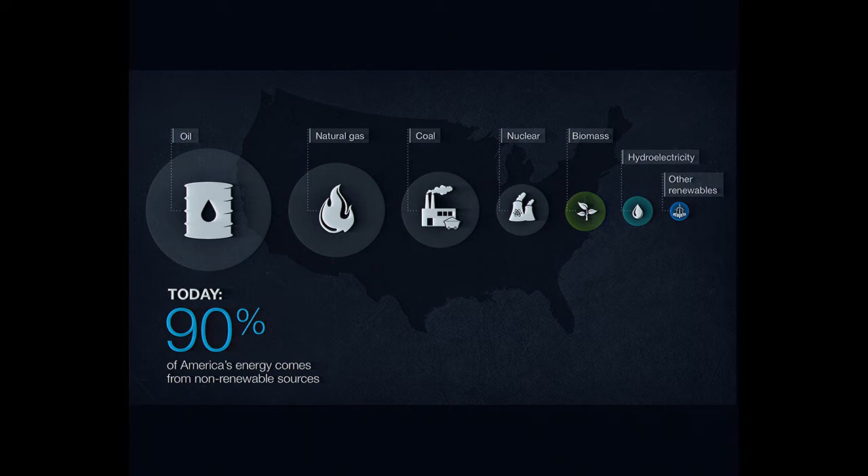And that's why we need a new fire. Switching from the old fire to the new fire changes two big stories, oil and electricity. And they have almost nothing to do with each other. They're less than 1% connected in North America, less than 5% in the world.

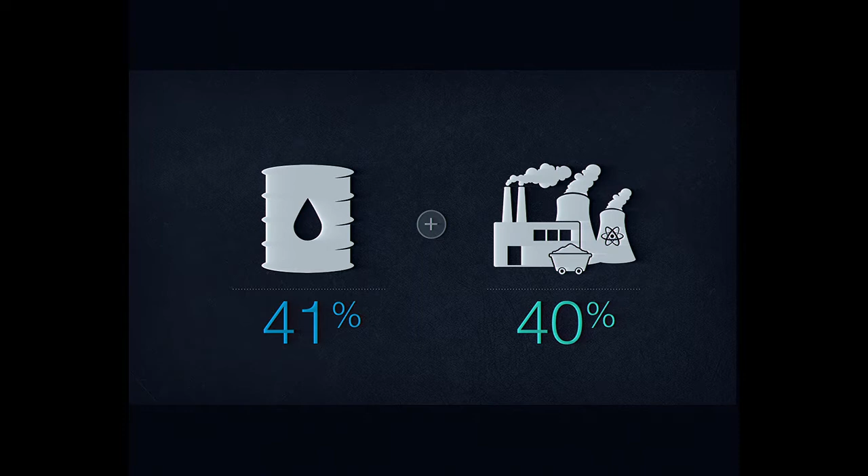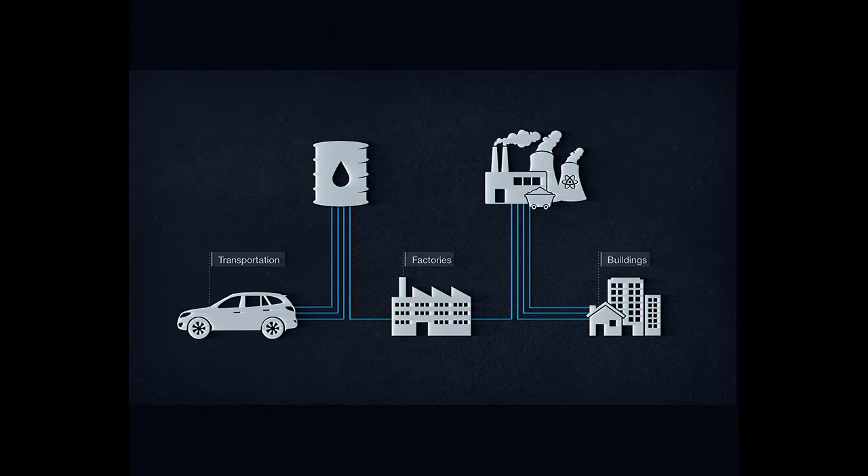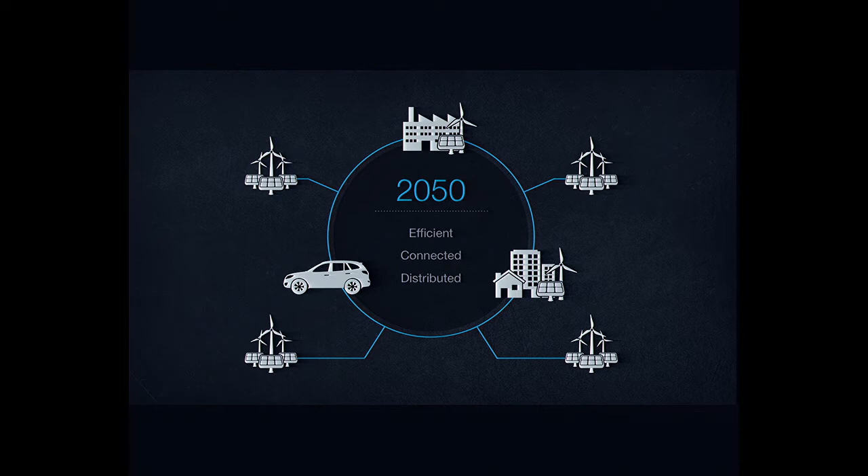But the uses of these two forms of energy are similarly concentrated. Three-quarters of U.S. oil fuels transport, three-quarters of electricity powers buildings, the rest of both runs industry. So very efficient transport, land use, buildings and factories can save oil, coal and natural gas that can displace both of them. But today's energy system isn't just inefficient, it's also disconnected, aging, dirty and insecure, so it needs refurbishment. By 2050, we found it could become efficient, connected and distributed with elegantly frugal vehicles, buildings and factories, all relying on a secure, modern and resilient electricity system. So in the United States, for example, we can eliminate our addiction to oil and coal by 2050 and use a third less natural gas while switching to threefold more efficient use and three-quarters renewable supplies.

That's the transition I'll describe for you. And we found that by 2050, this could cost the United States $5 trillion less in net present value than business as usual, counting all hidden or external costs like carbon emissions at zero, a conservatively low estimate, and lower than the price you have put on it in British Columbia.

Thank you very much for that.

And yet we found that this cheaper energy system could support a 158% bigger U.S. economy, all without needing oil, coal, or nuclear energy. And this transition would need no new inventions and no new national taxes, subsidies, mandates, or laws, thus end-running Washington gridlock.

Let me say that again. I'm going to tell you how the United States, for example, could get completely off oil and coal, $5 trillion cheaper, with no act of Congress, led by business for profit.

There are some policy changes required to enable and speed this change, but it turns out they can all be done administratively or at a state level, because our states, like your provinces, are where, in fact, most of our energy policy gets made and has been for a long time. So the idea here is to use our most effective institutions, private enterprise co-evolving with civil society, and in the U.S. case sped by military innovation, to go around our least effective institutions. And whether you care most about profits and jobs and competitive advantage, or about national security, or about environmental stewardship, creation care, climate, and public health, Reinventing Fire makes sense and it makes money.

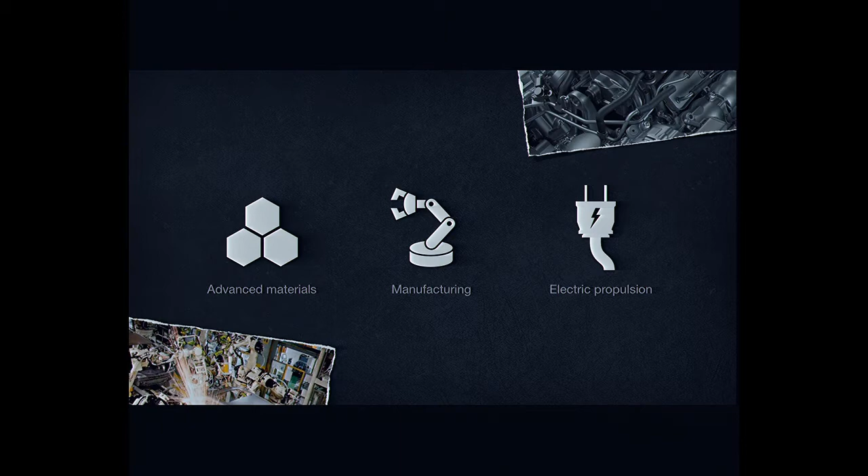The sales of such vehicles can grow and their prices can drop even faster with a temporary fee-bate—fees charged on inefficient new autos paying for rebates on efficient ones. You can make it revenue and size neutral. There are at least 6 such systems operating in the world, 5 in Europe, 1 in Singapore.

The biggest one, in France, in its first 2 years tripled the speed of improving auto efficiency. The resulting shift to electric autos is going to be as game-changing as shifting from small incremental improvements in typewriters to the dramatic Moore's Law-driven gains in computers. And of course, computers and electronics are now North America's biggest industry, while typewriter makers have vanished.

So vehicle fitness, taking the obesity out of the car, opens a powerful new automotive competitive strategy that doubles the oil savings in 40 years, but also makes affordable the electrification that can save the rest of the oil.

Now, North America or Japan or China could lead this next automotive revolution. The formidable barriers are much more cultural than they are technical or economic, and we're helping the new leaders of the auto industry on several continents to tackle them. But the current leader is Germany.

Last year, Volkswagen started making this 0.9 diesel liter per 100 kilometer, 2-seat, carbon fiber plug-in hybrid car. They're in low volume initial production. And BMW also started ramping up mid-volume production of this carbon fiber battery electric car. They've confirmed that its carbon fiber is paid for by needing fewer batteries.

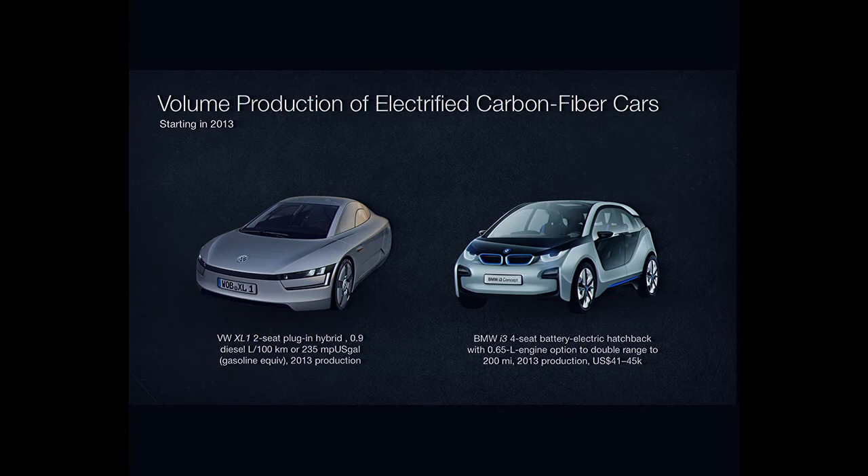Their CEO says, 'We do not intend to be a typewriter maker,' because he can look across München to where Olympia used to make excellent typewriters. Audi has also shown a less than 0.9 liter per 100 kilometer carbon fiber plug-in hybrid concept SUV.

Now, there are some interesting things that North American firms can bring to this party. 7 or 8 years ago, a process developed by one of our spin-offs, Fiberforge, created a test piece for military helmets that have been shipping for several years.

They made it in 1 minute, and it's a carbon fiber thermoplastic form that you can tell from the sound is extraordinarily stiff and strong. Actually, it's tougher than titanium.

Let's see, I think we can pass it around as long as you're really sure that I'll get it back again. But don't worry about dropping it. Tom Friedman actually whacked it with a sledgehammer as hard as he could and couldn't even scuff it.

Now, the technology, by the way, has been sold to a German Tier 1 whose North American operations are in Ontario. So it's now in the supply chain. And this sort of manufacturing technique, and its 16 competitors, can scale—this one in particular can scale to automotive cost and speed with essentially aerospace performance.

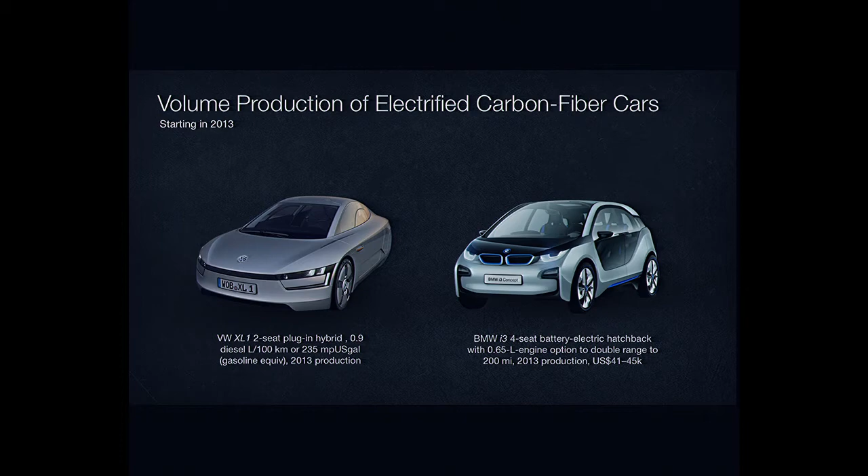That essentially we can find by drilling in the Detroit and Sarnia formations. And those nega-barrels under our automaking centers, the saved barrels, cost only $18 each. That's to pay for the electrification, since the ultralighting turns out to be approximately free. And that saved oil is domestic, secure, carbon-free, and inexhaustible.

Back in 2000, working with a couple of European Tier 1s, we designed a mid-sized carbon fiber SUV with half normal weight. It would get 3.6 liters per 100 kilometers, 67 miles per US gallon on gasoline, or 2.06 liters, that's 114 miles a gallon equivalent on hydrogen. And it was an uncompromised crossover mid-size SUV.

I expect you can see a lot of things over the way at the auto show.

But what was most interesting about it is how it's made. If you looked inside, you would find only 14 parts in the composite body. And like an airframe, they're suspended from rings, not built up from a tub, which is our horse and buggy legacy in the car business.

Each part is made with one low-pressure die set. In a steel SUV body, you would have 10 or 20 times more parts, each with an average of 4 progressive steel stamping die sets. So you just saved about 98 or 99% of the tooling cost.

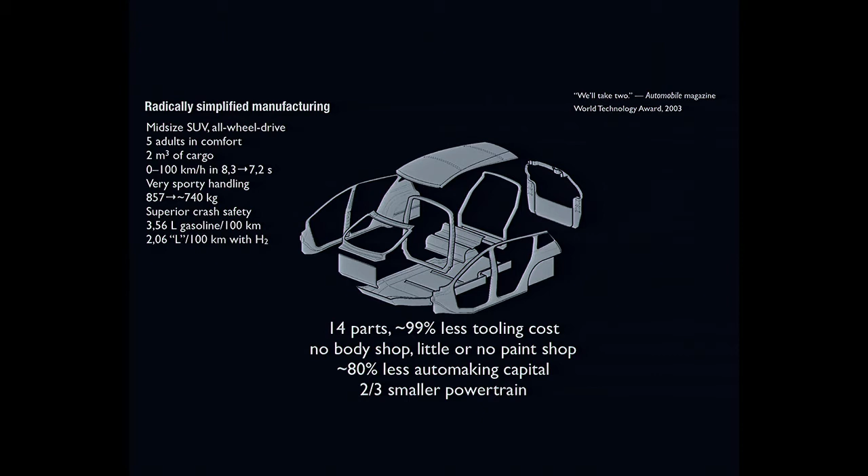Also the propulsion system gets 2/3 smaller. So those savings together in manufacturing and powertrain pay for the carbon fiber. That's why the ultralighting is approximately free. And carbon fiber itself is probably about to get a lot cheaper.

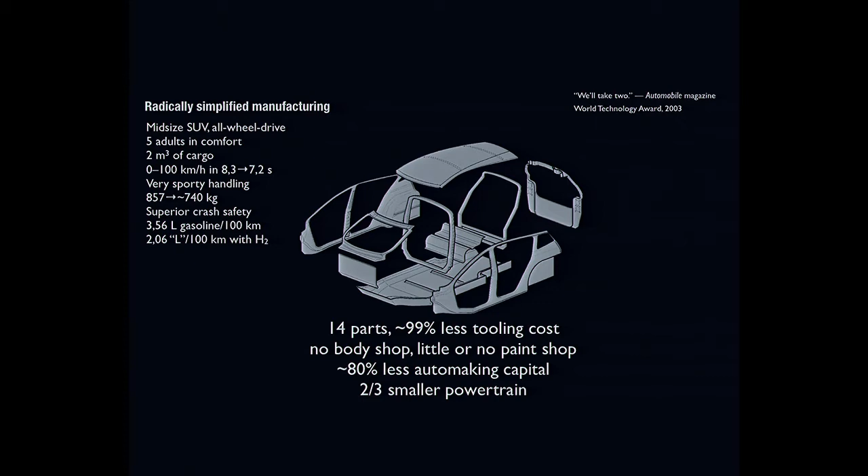In its featherweight, I expect they didn't do it for amusement. In fact, just to show that, the day before they showed this car, they had Toray, the world's biggest maker of carbon fiber, announce a big factory to mass produce carbon fiber car parts for Toyota, not a phrase previously much heard in the industry. And now there are 4 or 5 other automakers in that consortium. So Volkswagen and BMW will soon gain worthy competitors, and not only in Japan.

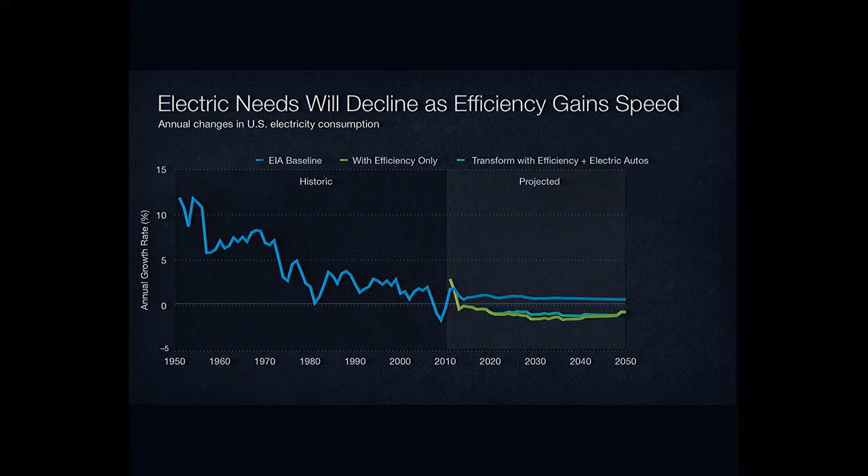It's been drifting down ever since. Same in Germany, same in Denmark. And the electricity used, adjusted for weather, per dollar of real GDP actually fell in 2012 alone by an unprecedented 3.4% in one year. But we can keep demand dropping as the economy grows by reasonably accelerating existing trends.

Over the next 40 years, U.S. buildings, which I'll remind you use three-quarters of the electricity, can triple or quadruple their energy productivity, and that would save 1.4 trillion net U.S. dollars with a 33% rate of return. So the savings are worth 4 times their cost.

Industry can also accelerate and double its energy productivity with a 21% internal rate of return. And to do these things by 2050, we just need to ramp up by 2030 the national average adoption of efficiency to the levels that our Pacific Northwest states, right over the border from here, already achieved 9 years ago.

Now, a key to such big savings is a disruptive innovation we call integrative design that can often make very large energy savings cost less than small or no savings, turning diminishing returns into expanding returns.

That's how our 2010 retrofit is saving two-fifths of the Empire State Building's energy. Remanufacturing its 6,514 windows on site in a temporary window factory on a vacant floor into super windows that pass light but block heat, plus better lights and office equipment and the like, cut the maximum cooling load by one-third.

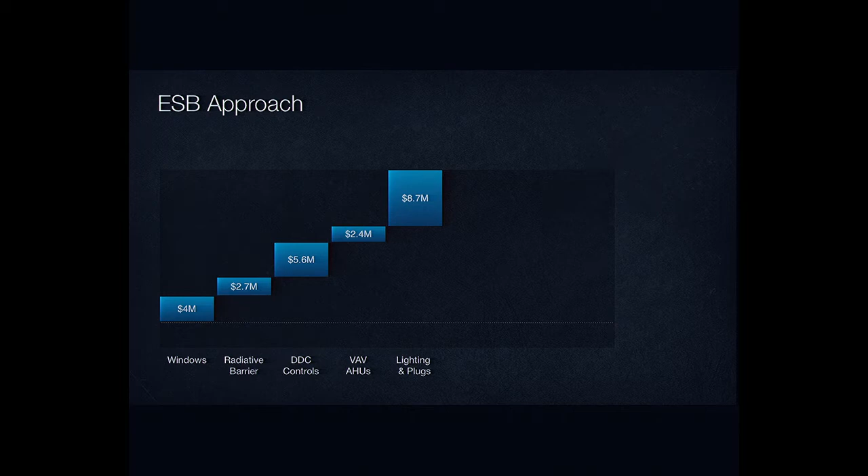And then renovating smaller chillers instead of adding bigger ones saved $17 million of capital cost, paying for most of the other improvements and cutting the payback to just 3 years.

That is, by the way, the same payback that a major energy service company had offered to save just 7%. So we got six times bigger savings by optimizing the building as a system rather than the components in isolation.

Our latest cost-effective deep retrofit of a difficult 48-year-old U.S. government building that faces the wrong way is expected to cut its energy use 70%, probably making it more efficient than the best new U.S. office building. For the 30,000-odd European passive buildings that, like ours, need no heating but have about normal construction cost, they don't need to look like this to work like this.

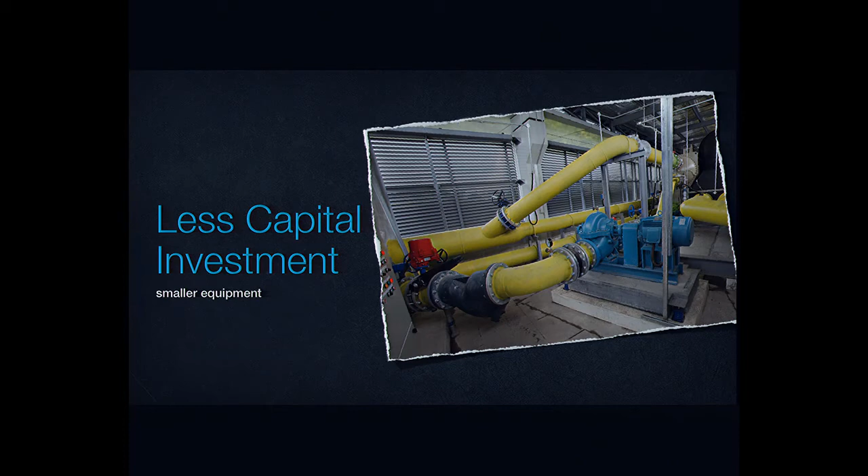And of course, as we rearrange our metal furniture as designers, we're also saving capital cost because less friction in the pipes means smaller pumping equipment and less capital cost. When we did that in our own house, we saved 97% of the pumping energy with lower capital cost.

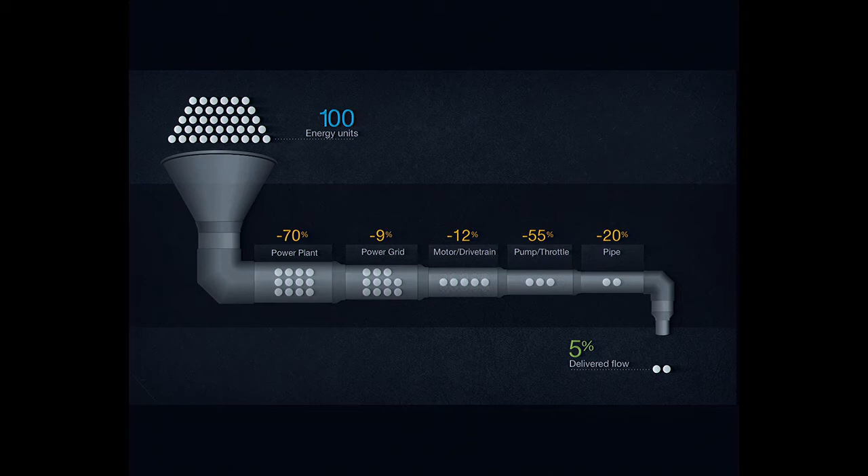So what do such savings mean for the electricity that is 3/5 used in motors? Well, from the coal or other fuel burnt in the power plant, there are so many compounding losses that only 1/20 of that fuel energy actually comes out the pipe as flow. But we can take those compounding losses from left to right and turn them around backwards into compounding savings from right to left. Every unit of flow or friction we save in the pipe compounds back again to save 20 units of fuel and cost and pollution and what Hunter Lovins calls global weirding back at the power plant.

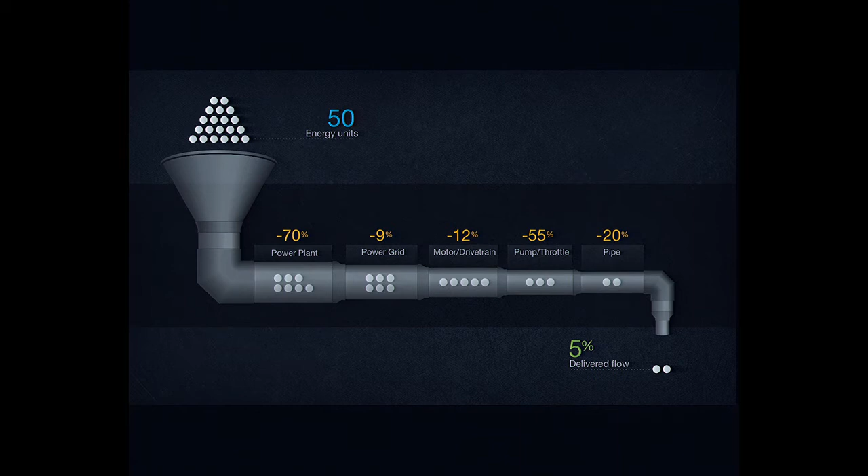And of course, as you go back upstream, the components get smaller and cheaper. So our team has lately found such snowballing energy savings in over $40 billion worth of diverse industrial redesigns, from this Hewlett-Packard data center and Texas Instruments chip fab to Rio Tinto and Anglo-American mines and Shell hydrocarbon facilities.

Typically our retrofit designs save about 30 to 60% of the energy with 2 or 3 year paybacks, whereas in new facilities, savings are a bit bigger, say 40 to 90 odd percent, but almost always with lower capital cost. Now, needing less electricity would in turn ease and speed the shift to new sources of electricity, chiefly renewables.

By the middle of last year, new solar power in the western U.S. was selling for as little as 5 cents or less a kilowatt hour, Midwestern wind power for less than half that much. Now, in Germany, the installed photovoltaic system cost only half as much as the average American ones, even though we all buy the same equipment. They just install it more efficiently.

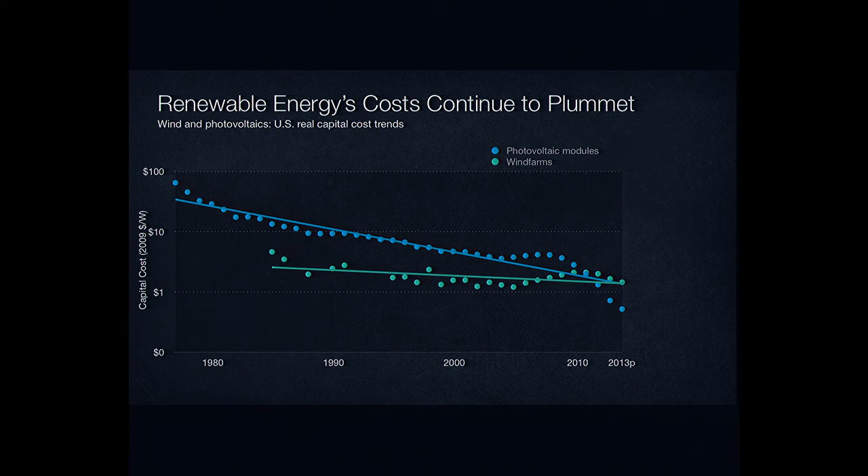Because electricity production has become a scalable global commodity, a manufactured product. China in 2012 made more wind power than nuclear power. They doubled each year their wind power for 5 years running. Last year, China added more solar power than the United States has, and we invented this stuff.

And the global clean energy sector has brought Europe over 1 million renewable energy jobs. It's created more American solar jobs than we have coal or steel jobs. And in each of the past 3 years, these modern renewables got $250 billion of global private investment and added over 80 gigawatts. So they have far surpassed the global installed capacity of nuclear energy, whose dwindling annual net additions actually turned negative before the Fukushima accident.

Let me give you an example of how this can work. The isolated Texas grid's summer electric loads in 2050 can get a lot smaller with profitable efficiency, but it's still about 30 billion watts. So let's meet all of that renewably.

We'll put in enough wind and solar to meet 86% of the annual load, and then the other 14% we'll get from the other renewables that are dispatchable. You can have them whenever you want. So that's geothermal, small hydro, solar thermal electric, burning municipal waste, burning energy crops, burning feedlot biogas in existing combustion turbines. So now we have 100% renewable supply, except it doesn't match the load shape very well.

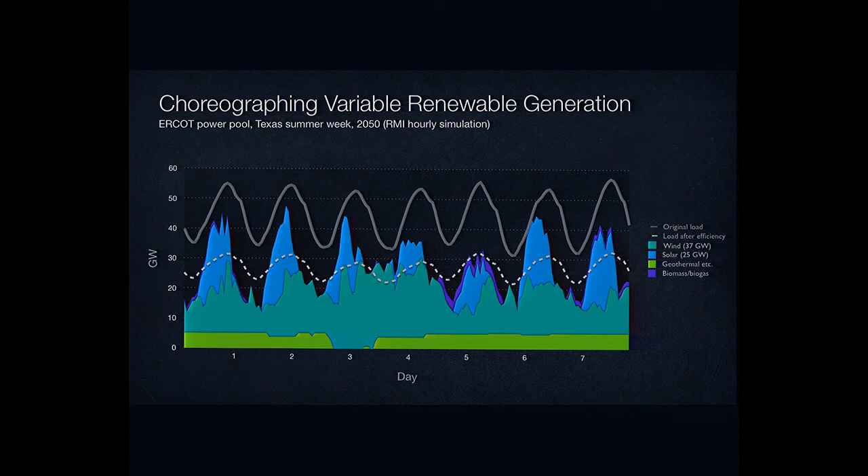But now we can take those surpluses and put them into two kinds of distributed storage. We can use them to charge up both ice storage, air conditioning, and smart electric vehicles. And then we can get that distributed storage back when we need it, fill in the last bits with some unobtrusively flexible demand. Now we have 100% renewable supply every hour of the year. We didn't put in any bulk storage to get that result, and there's only 5% left over.

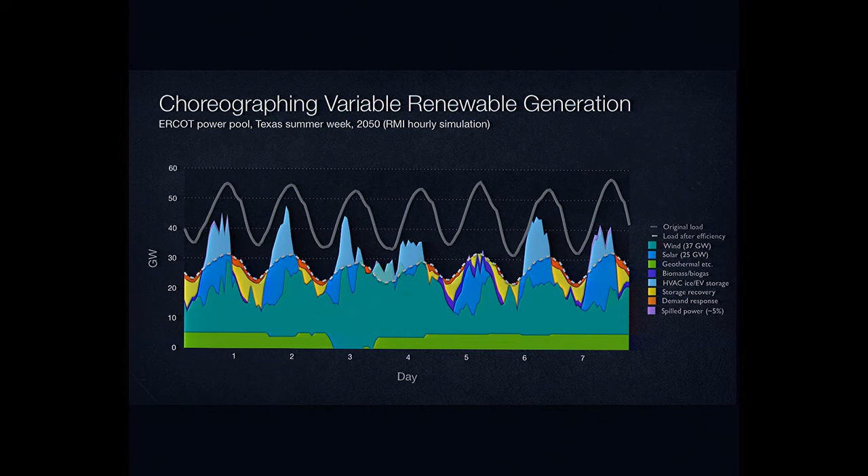Now, this sort of choreography is not just theoretical. Some European countries, without adding bulk storage, are already delivering, last year, 25 to 58% renewable electricity, far more reliable than America's. Actually, the most reliable in Europe is from Denmark and Germany, and theirs is about 10 times more reliable than United States electricity.

Also, Iowa and South Dakota are over a fourth wind-powered today. So they in Europe have far transcended renewable power's supposed reliability limits. Whatever exists is possible.

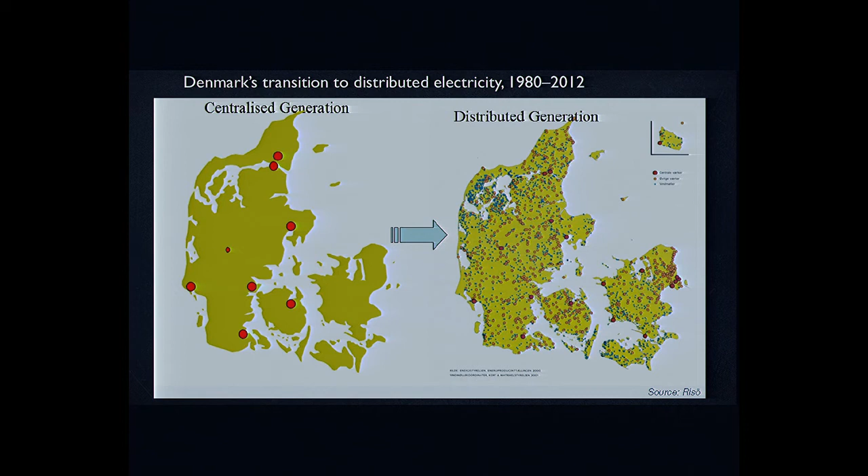Now, one of the most important examples of the decentralization trend sweeping the industry is Denmark, which over 3 decades has shifted from essentially all centralized coal-fired power plants to a constellation of decentralized wind turbines, 86% owned by farmers and their co-ops and communities, and ag waste cogeneration. And Denmark plans 100% renewable energy, not just electricity, by 2050. They're on track or ahead of schedule. They don't think it'll cost extra. And they've also been reorganizing their grid in a cellular architecture that makes cascading blackouts impossible.

Now, in America, we have this aging, dirty, insecure electricity system that we have to replace anyway by 2050. And we could replace it with more of what we've got, or new nuclear and so-called clean coal, or centralized renewables, or half-distributed renewables. Surprise, they all cost the same. But they differ profoundly in their risks around national security, fuel, water, finance, technology, climate, and health. 7 kinds of risk. Same cost, different risk.

This is a risk management play when we choose our electricity future. For example, we have this over-centralized grid, just as you do, very vulnerable to cascading and potentially economy-shattering blackouts caused by operational problems like, say, squirrels, tree limbs, ice storms, solar storms, superstorms, earthquakes, physical attacks, cyber attack. All these things have happened lately, although the solar storms haven't been big for a while, and that's just a matter of when, not if.

But that blackout risk disappears, and all 6 other kinds of risks are best managed if we pick distributed renewables organized in microgrids that normally interconnect freely but can stand alone at need. So they can disconnect fractally, reconnect seamlessly. That is actually the Pentagon strategy for supplying power to its own bases because they need their stuff to work. Well, the rest of us whom they're defending need our stuff to work too.

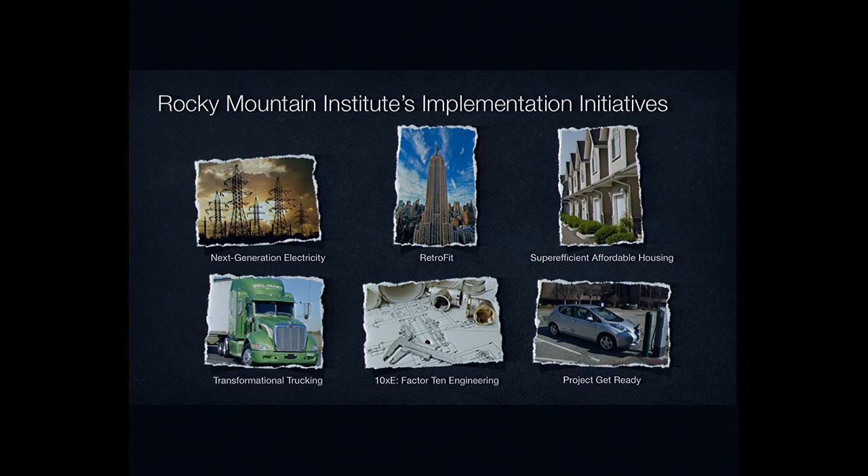Now, what I've described for you is not just a once-in-a-civilization business opportunity. It's one of the greatest transformations in the history of our species. We humans are really inventing a new fire, and it's not dug from below, but flowing from above.

I've even heard theologians talk about energy from hell and energy from heaven. And this new fire is quite different. It is not scarce but bountiful, not local but everywhere, not transient but permanent, not costly but free, and but for the transitional tail of natural gas and a bit of biofuel grown in ways that sustain and endure, this new fire is flameless and very efficiently used in a way that makes money.

It really could enable energy to do our work without working our undoing. Each of you owns a piece of that prize wherever you live. Our book details how you can capture it.

So with the conversation begun at reinventingfire.com, let me invite each of you to engage with us, with each other, with everybody around you, to help make Canada and the world healthier, richer, fairer, cooler, and safer by together reinventing fire. Thank you for who you are and what you do and all your good work.